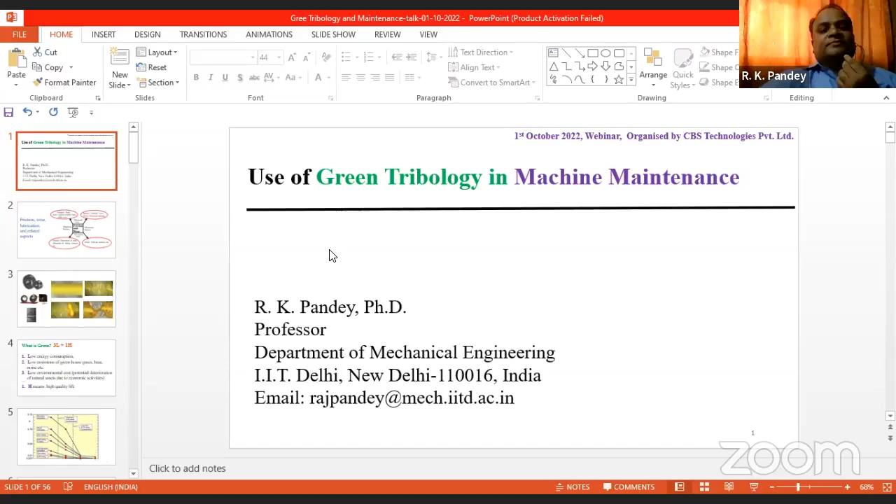Is it visible to all of you? Hello, please confirm. Yes sir, it's visible. Okay, visible, sir.

So basically, we'll be discussing the use of green tribology in machine maintenance. So the green aspect together with machine maintenance perspectives will be covered in this webinar. Let me start in a very focused way.

Normally, across our industrial life, we see a lot of machines, and these machines have some places, elements, where friction should be more, where it should be less, or where both friction and wear should be less. A very energy efficient system is needed. We are looking here—this combination, whatever you are able to see right now, is pointing out particularly what we are focusing on here.

So brakes, clutches, tires, etc.—we need minimum wear and maximum friction. So it's a friction-based system. And here, bearings, seals, gears, piston rings, and liners, slide ways—here we need minimum wear and minimum friction. And some places require maximum friction and maximum wear also; then only the system will work.

So I understand, for those who are a little unfamiliar with tribology—tribology involves basically friction, wear, and lubrication aspects. And this word got coined in 1966. This is very well-known, well-documented, and available everywhere.

Because the UK government set up one committee to study what losses were happening in UK industries, because engineers were not aware what friction is, what wear is, how to lubricate it. And another aspect was that as engineering was getting more mature, with more and more technology coming in, the maintenance cost of industries in the UK was increasing.

So the mandate of the committee was to study that and suggest what to be done. The committee constituted in 1964 submitted the report after two years, in 1966. This report was shared in the UK Parliament. And in 1966, people observed that in place of friction, wear, lubrication, only one word, tribology, was used.

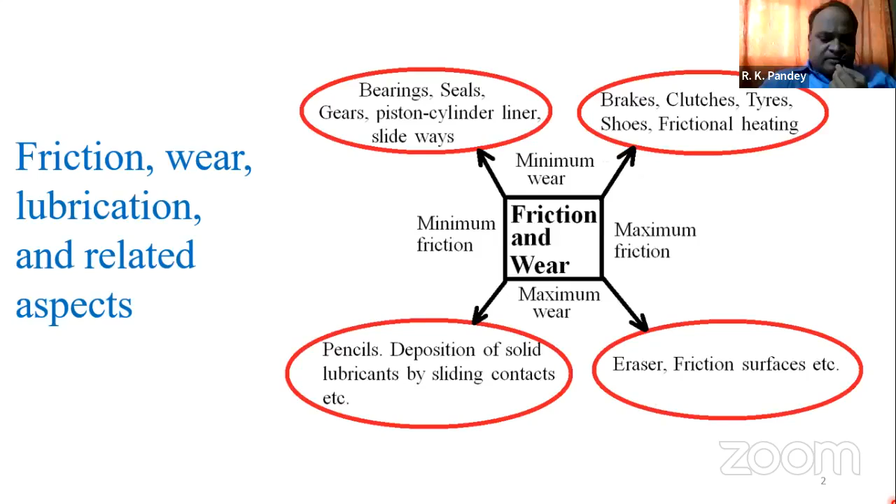So let us come directly to the machines. We are aware that gear sets, bearings, piston rings, lubrication aspects, many more. Surfaces are bound to happen there because two elements we are bringing together, then only functionality of the system is possible. So there is a need to assemble it.

But we understand that when two surfaces are being brought together, dry contact will be there. Friction will be very high, or solid friction will be there, and that is not required. The reason is, under loaded condition, if relative motion at the contact is happening inside the machine element, we understand the consequences: friction will be more, heating will be there, wear will be there, seizure may happen, and the system may stop functioning - total failure.

So it was thought, since ancient times, that if solid friction is there, the ideal situation is to replace it. But if that is not possible, then replace it by a lesser friction element, that is lubricated contact. If dry contact is replaced by fluid friction based contact, then that is acceptable - at least friction is getting reduced. Though the ideal condition is that physical contact should not happen, friction at all should not be there.

But we know this is not possible, functioning of the system may be lost. So physical contact is bound to happen. Then how to replace dry contact by lubricated contact?

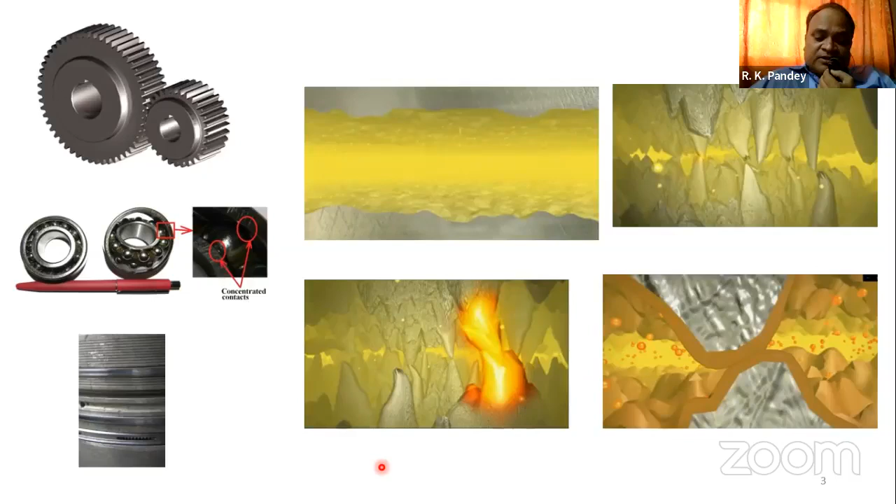So the question is, we have understood the meaning of tribology: friction, wear, lubrication. Together we study its consequences - how to reduce, how to increase - all these aspects we study under tribology.

So what is the green perspective today, what is the meaning of green? Green is 3L plus 1H. What is 3L? In a very generic sense, low energy consumption should be there in the machine element and system - mechanical system, since several machine elements may be involved in the machinery. So low energy consumption should be there, this is a green concept. Low emissions of greenhouse gases, heat generation, noise - all these also come under green. The third point is low environmental cost should be there, meaning whatever activities we are doing, our machines are doing, or whatever outcome comes, it should not degrade the environment. So potential deterioration of natural assets due to economic activities should be less.

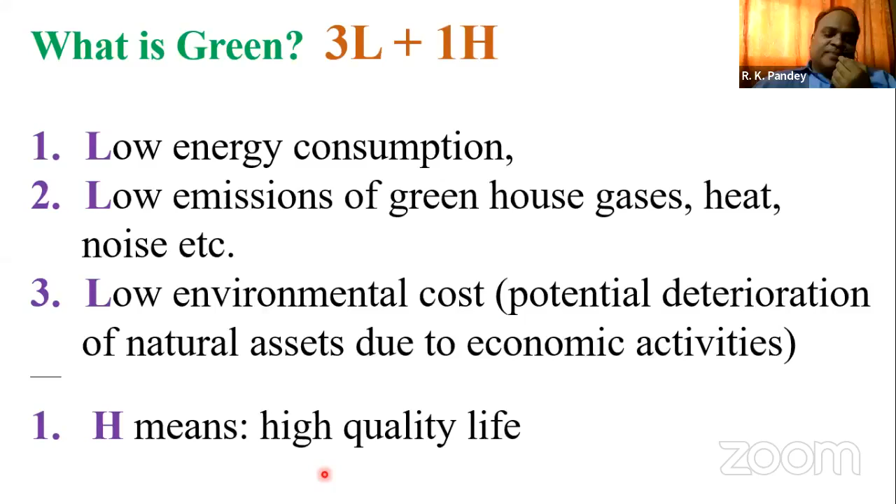And clubbing all 3L, we should get H - meaning high quality of life should be there. So everything is happening to improve the quality of life. So the green aspect is there.

Now if you see what people are doing across the globe - if you go about 25 years back, the regimes of lubrication were such that coefficient of friction varied from 0.15 to a little more than 10 to the power minus 3. Now massive research is being done across the globe, and the intention is that irrespective of the lubricant, irrespective of the contact - whether concentrated contact or conformal contact - everywhere friction should come closer to zero.

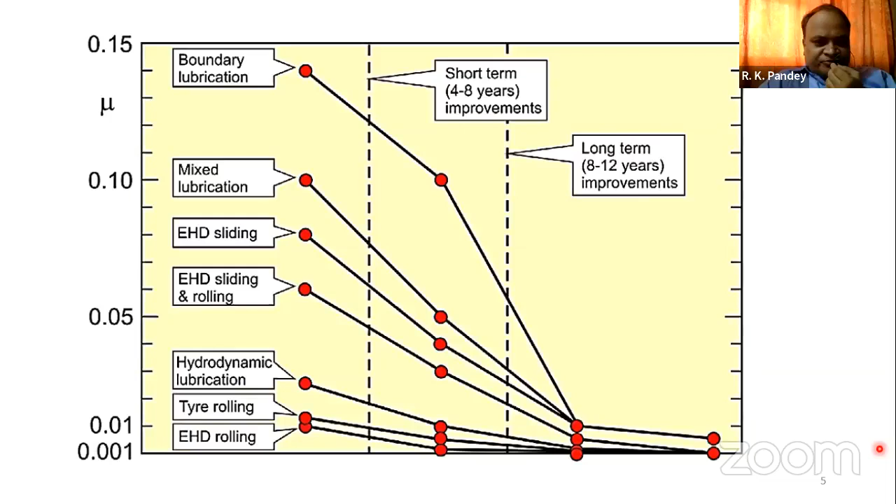So that is the objective, but presently it is not there. People in the laboratory have at least brought the coefficient of friction to the order of 10 to the power minus 3. And further research is going on to minimize this gap and bring the coefficient of friction, for all natures of contact, irrespective of lubrication regime, close to zero, of the order of 10 to the power minus 4 or 10 to the power minus 5.

So I think green is a broader term, and it involves minimization of heat generation. People understand that whatever emissions are there, that is only green. No, emissions are not the only green issue. Even if electric vehicles are coming, so we are replacing fossil fuel consumption and reducing emissions, that is the concept people are thinking, but it is not. Because electricity systems are there, somewhere we are generating electricity, and at least in our country coal-based plants are there. So coal is getting burnt, emissions are happening, and all those issues are still there.

And another thing, suppose we are able to replace electrical energy based on thermal power plants with nuclear or some other things, then what about the electric vehicle? An electric motor will be there, batteries will be there, so heating will be there, and all those systems also have their own consequences. It is well said that negative and positive will both be associated with everything. So electric vehicles are also having these types of issues, energy dissipation and heat generation. So if we are minimizing that, we are not warming the environment, and that is also green.

Where we are reducing wear, it is good, because where wear is there, we are changing the part, component, etc. Machining will be involved, further purchasing will be involved. So those issues are also very detrimental. So minimize wear, life should be long. A reduction or complete elimination of the lubricant: it is well said that lubricant may be blood for the machine, but it is poison for the environment. The disposal issue, the fumes and all the consequences are very degrading.

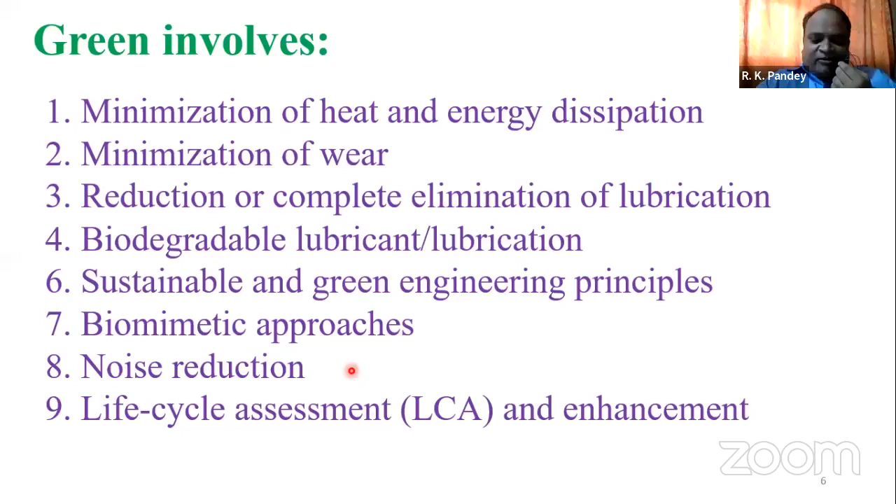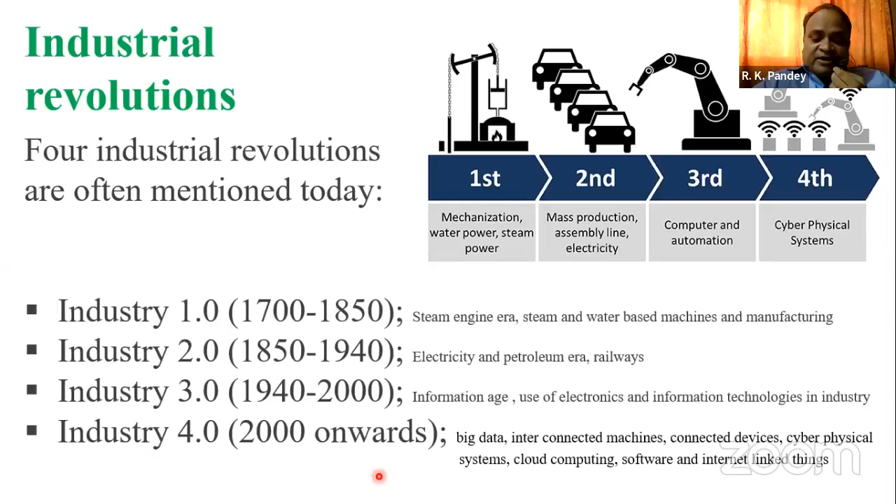So the industrial revolution happened, and we are aware of industry 1, industry 2, industry 3, industry 4. So what major points came during these eras? You have a look at this. But today's scenario is industry 4, where we are dealing with big data, interpretation, manipulation, cyber-based things. So our industry, our plants and factories, will basically be unmanned. Machines will be operating in that situation, so what tribology will do and how to deal with that is the issue. So see what is set inside industry 4, in cyber-physical systems.

So using this, machines will be working, industry of the future will be working. Now for these machines, advanced maintenance, monitoring and diagnostic systems are needed. And advanced technology for energy saving and life extension is needed. So we are focusing on this today.

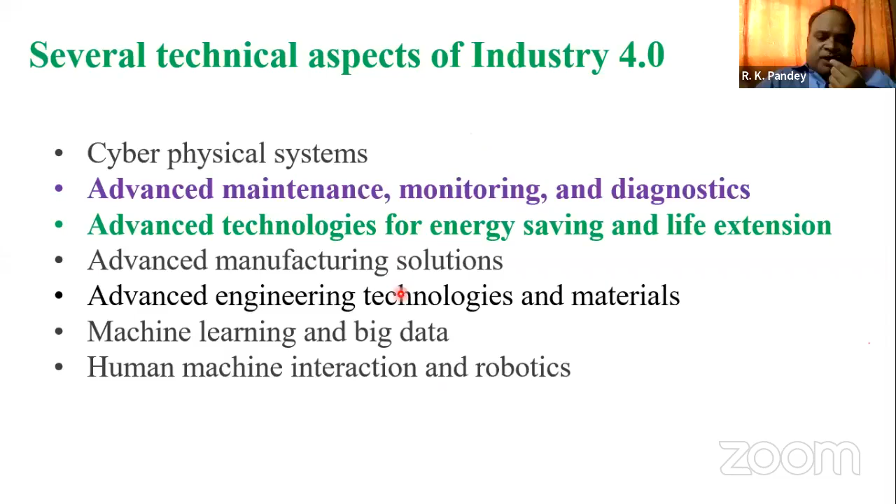The theme of today's seminar is how to address these concerns through tribology. And machine maintenance, of course, will be there. So we will be speaking on these 2 points, some part in this lecture, some part by another speaker. So this is a part of Industry 4.0, whatever we are talking about right now.

So I feel you are understanding now, tribology involves more and more scientific, environmental and socioeconomic issues. So when we involve these things in tribology, then it becomes green tribology. The term green tribology is recognized. So what do tribological studies regard? Transport, machine components, machining, forming. All these things are part of Industry 4.0.

So research is going on, we are doing it also, it is a futuristic thing. So all these things are part of green tribology. We are working and there is more work to be done. So there is a significant development of environmentally friendly tribology technology. All these things together we call green tribology. So there is a thrust in Industry 4.0 on green tribology.

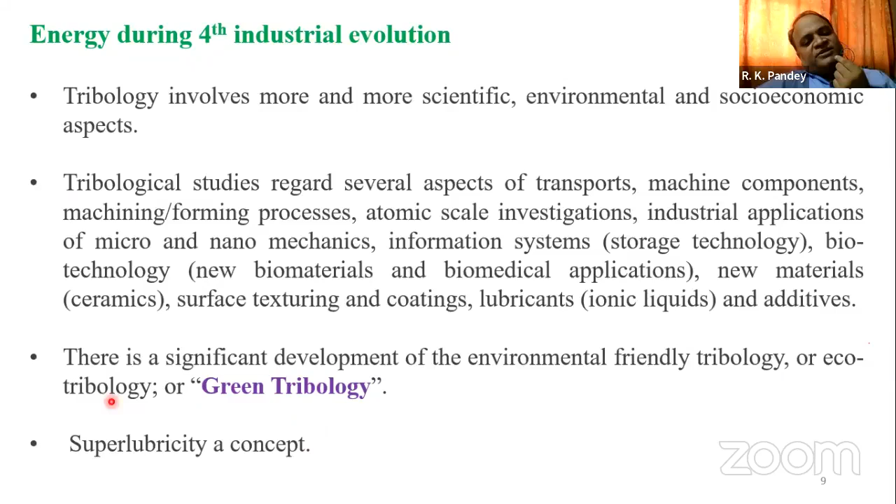And the concept I was talking about, getting friction to 10 to the power minus 4, 10 to the power minus 5, irrespective of the regime of lubrication, is called the super lubricity concept. Nowadays, worldwide research is going on this super lubricity concept.

So how to improve the energy efficiency of the system? I'll be giving 2 examples very quickly. This is basically the research of our team at IIT Delhi, our PhD students and M.Tech students. So let us see what we have done in tribology, how we have made it green tribology.

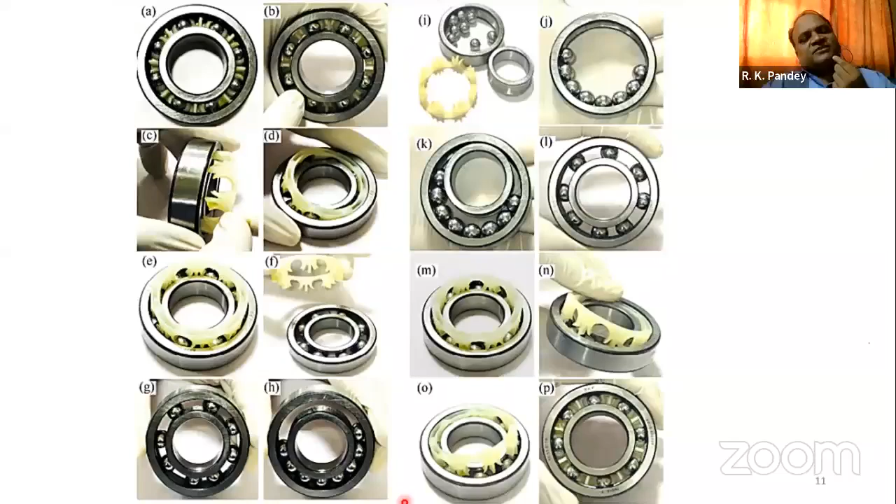About 80% of bearings used in industries, in machines, or even domestic appliances are ball bearings. Ball bearings are very prone to vibration. The reason is these bearings have low damping capacity. So what is to be done? How to enhance the damping? How to reduce the frictional losses inside these bearings? Because these bearings are used at a large scale. So here at Delhi we attempted this, and I would like to share those results with you.

In ball bearing lubrication, basically we reduce friction and wear using a lubricant. We are interposing a certain medium at the contact. Our intention is that friction and wear should be less. But grease lubrication is really very tricky. So here one example is being demonstrated.

We kept grease here, then we bring one ball here and just rotate it by hand. Now what is happening? Grease is getting pushed aside. After 2-3 rotations, the grease has gone. Now imagine in a machine at high speed, if the rotor or shaft is rotating, the grease will be pushed aside. It will be thrown because centrifugal force acts on the grease itself, and the balls are moving very fast.

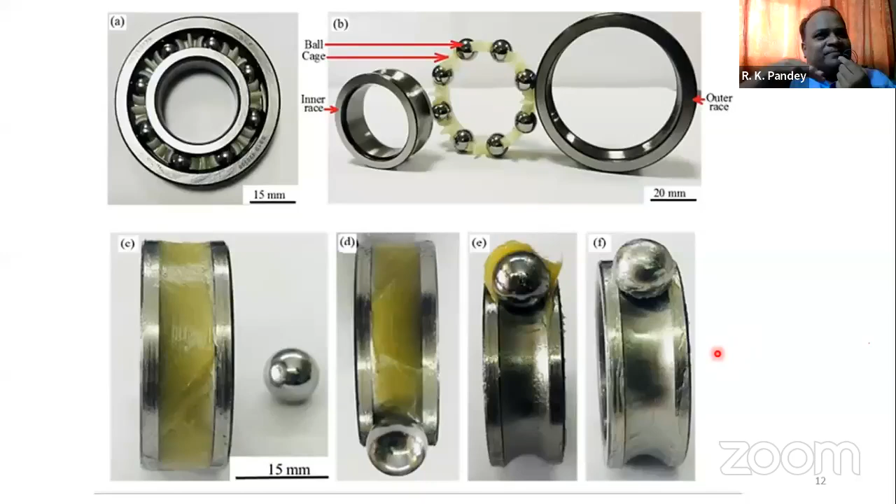And grease is basically soap, and soap has a considerably larger yield strength compared to oil. So grease coming back onto the track is very difficult. So why are ball bearings prone to vibration? The reason is the inherent damping capacity of bearings is very low. And we assume lubrication is happening, but basically it is not happening. I'll be demonstrating some images and explaining this.

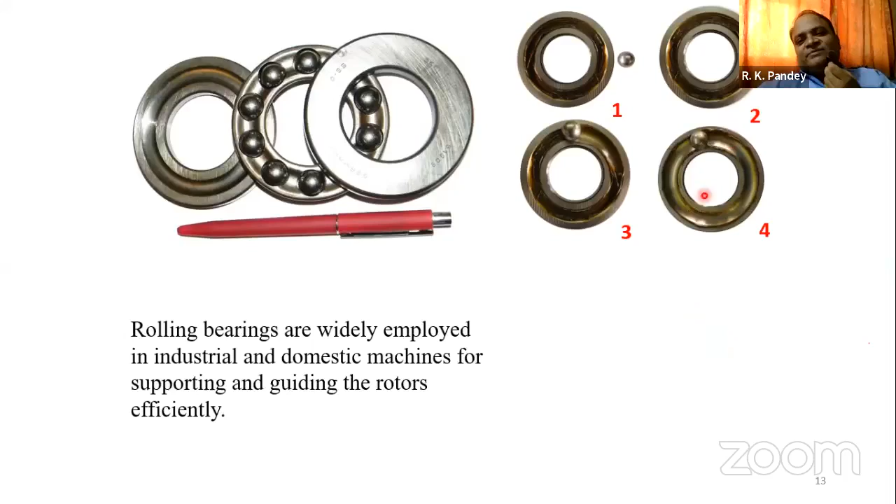So here, this is a thrust ball bearing. We have taken one grease grade, and now the ball has been brought, you see. Now it has been rotated. After 2-3 turns, the grease is getting pushed aside. This is a demonstration of how the bearing will be working.

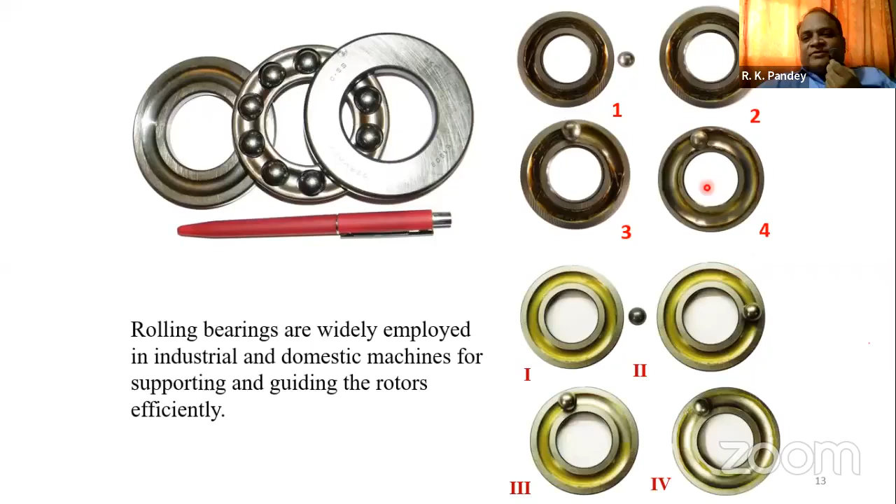Now here we are using a lower NLGI number grease, same setup, same concept, and a few rotations are done. So let us compare this and this. What is happening here? Here the NLGI number is high, and the grease on the track is getting removed. We did only 3-4 turns like that.

And here, this is a lower NLGI number. So a little grease is there, available at the base. The issue is that once it runs at very high speed, maybe 2000, maybe 1500 RPM, then you can imagine there will obviously be metallic contact.

Little lubricity may be there. Traces of the grease or oil may be there. So that will be working well, and mainly ball bearings work because rolling friction itself is less. Even if metallic contact is there, friction will be very less. So we thought how to improve it, what is to be done.

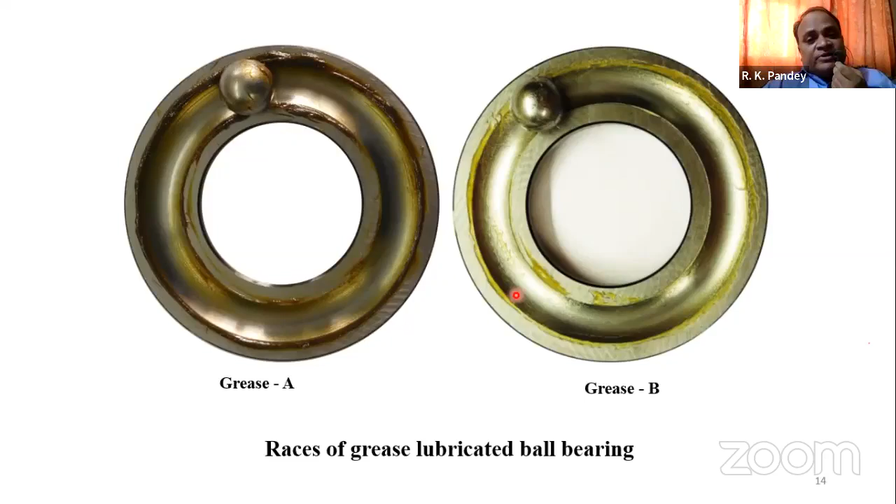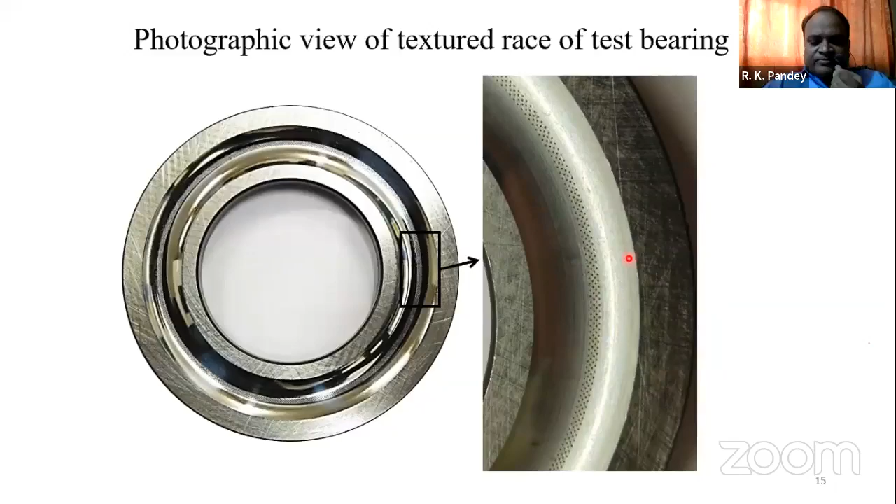So here one concept is there nowadays. If you are looking here, the texture concept is emerging, a very viable concept. So you are looking here, certain steps are being implemented. Through laser we did it like that. Whatever holes are visible right now won't appear like that to the naked eye. This is 10 micrometer, 20 micrometer size.

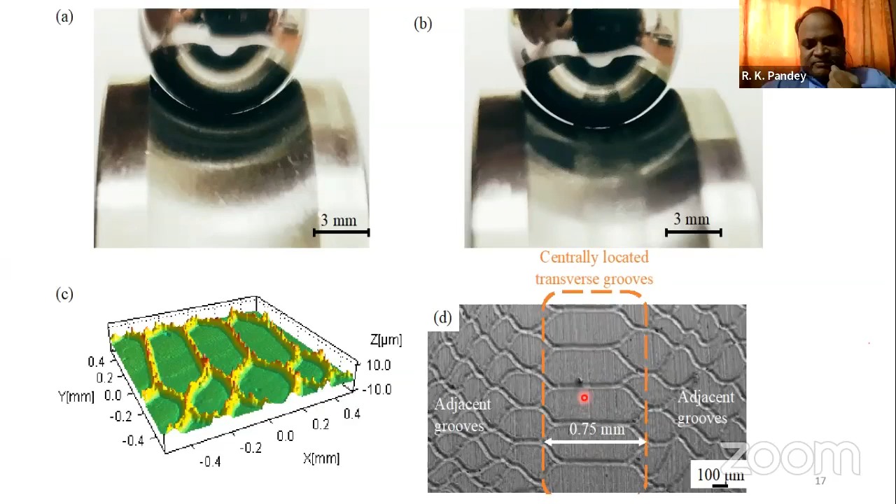What is the logic behind that? The logic was that grease is not present at all when dynamics is happening. So why not give micro grooves so grease should be available here. And when heating is there, whatever soap is there and the bleeding of oil will come here, and better lubrication will happen. So this we did, and we conducted an experiment.

So you are looking here, a load cell is there, and we tried to measure frictional torque. In a ball bearing, as such, friction coefficient is not there because several types of contacts are there. Some contacts may have high load, some less load. Balls are there, cages are there. Normally I have seen people find the friction coefficient of a ball bearing. It's not like that. It is always frictional torque, because we are finding it in totality. So frictional torque has been measured here.

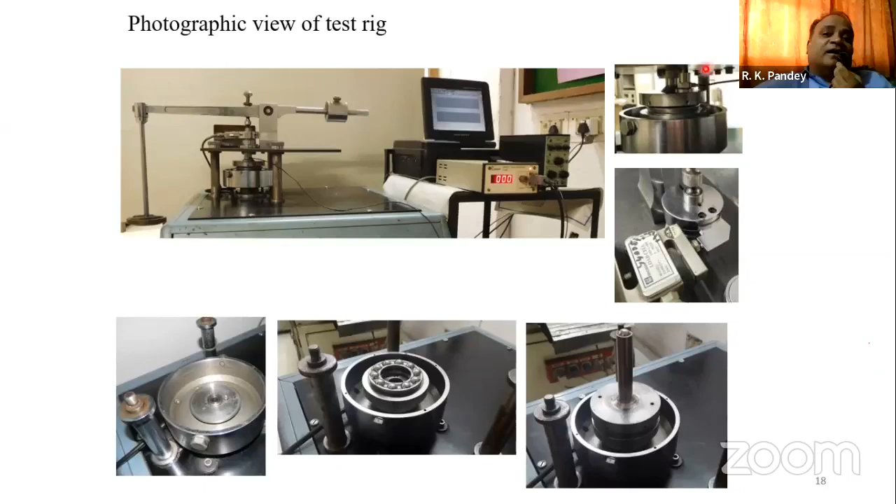And here you see, an accelerometer is also there. This accelerometer is meant to understand its dynamic vibration, because when the fatigue test is done, if surfaces get damaged, ultimately we have to go in the shelter of temperature rise, increased frictional torque, and enhanced vibration. So these 3 parameters we have to correlate. So this experiment was done, and I would like to tell you the status.

So this is the conventional race when texture was not done, and when texture was done. You see the retainability of the grease here, and here grease is not there. Because film thickness visualization is very difficult, we kept one finger there and just removed it, so these ridges have been formed. It is indicating the quantity of lubricant available is more here, and here it is very less. So this is the advantage.

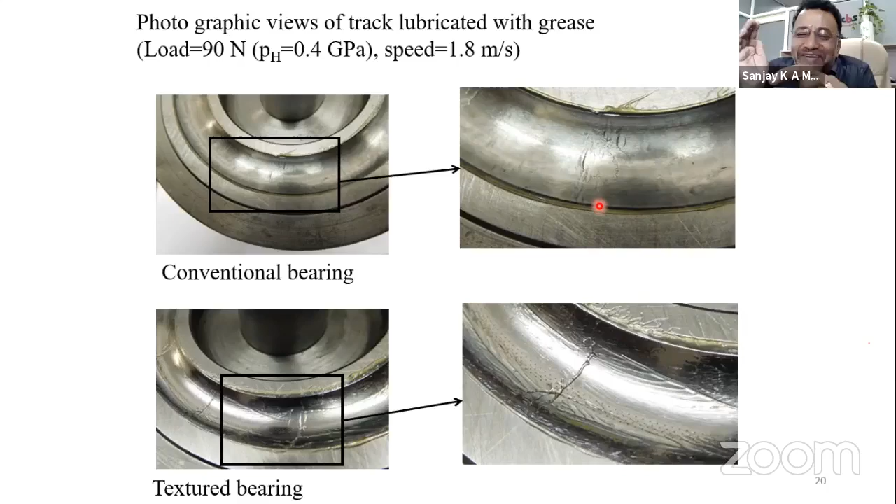Dr. Pandey, can I disturb you, sir? Time is up. Okay, yeah. One minute more, sir. Okay, we will have a separate session. Yeah, one minute, quickly. Only one minute.

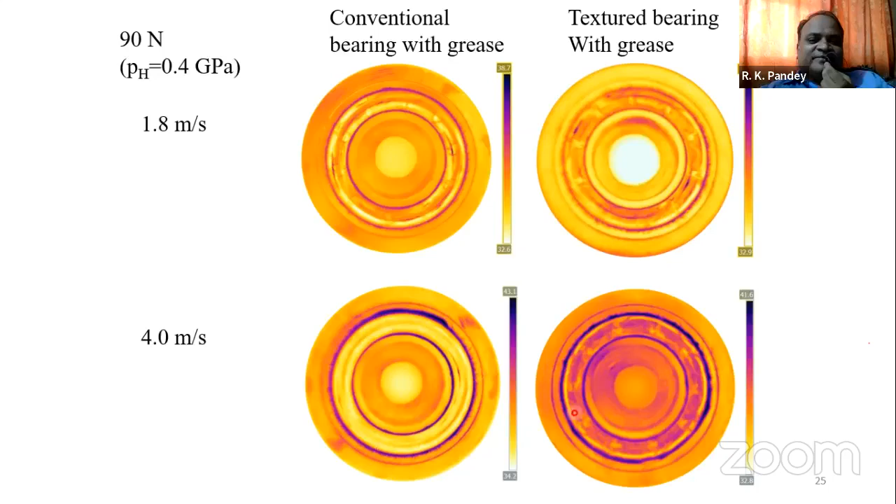So, just you see, we did certain research, and then the advantage. If you see here the bearing, bearing greases are here. You are looking here, this is getting pushed aside, so here at the contact this is not there. This is thermography. The images you are looking at are of the thrust ball bearing. It is indicating that grease is getting deposited once a certain texture is done.

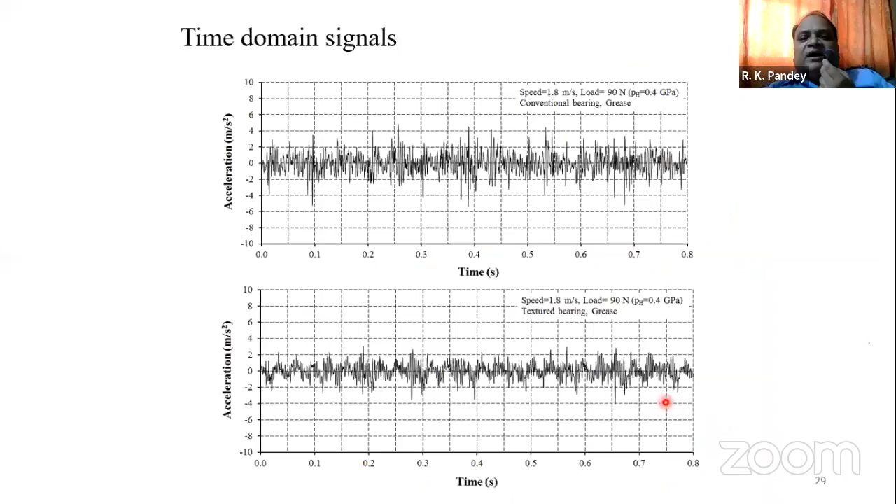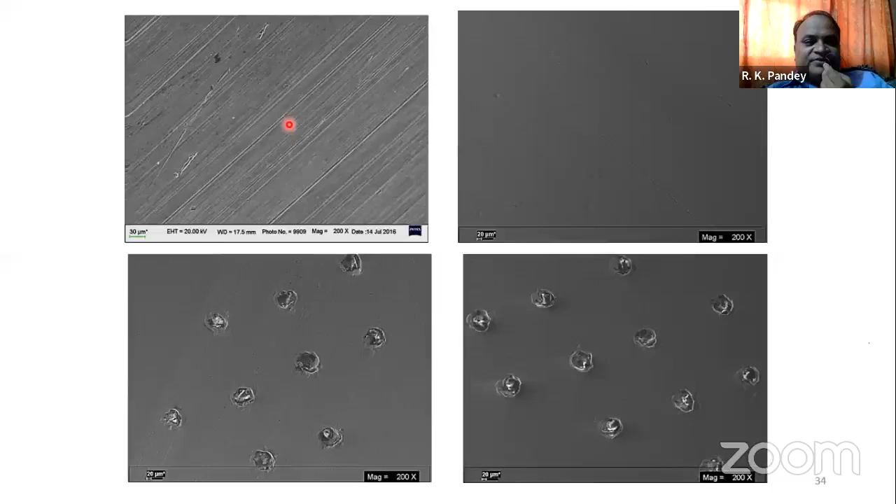And obviously here in vibration, if you see in the time domain, it has been reduced. And similarly, vibration in the frequency domain is reduced also. And surfaces are not getting scratched when we are putting this dimple. If you see, this is the conventional surface. And similarly, we have used it in gear also, and in this vacuum pump.

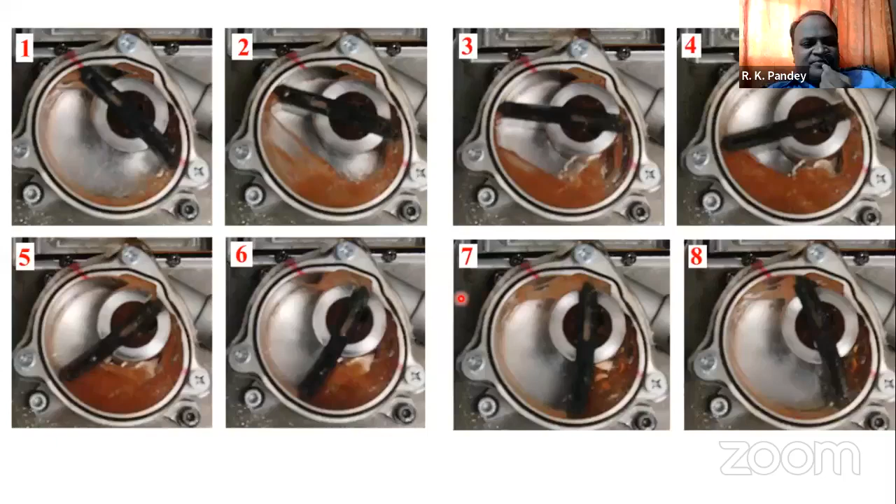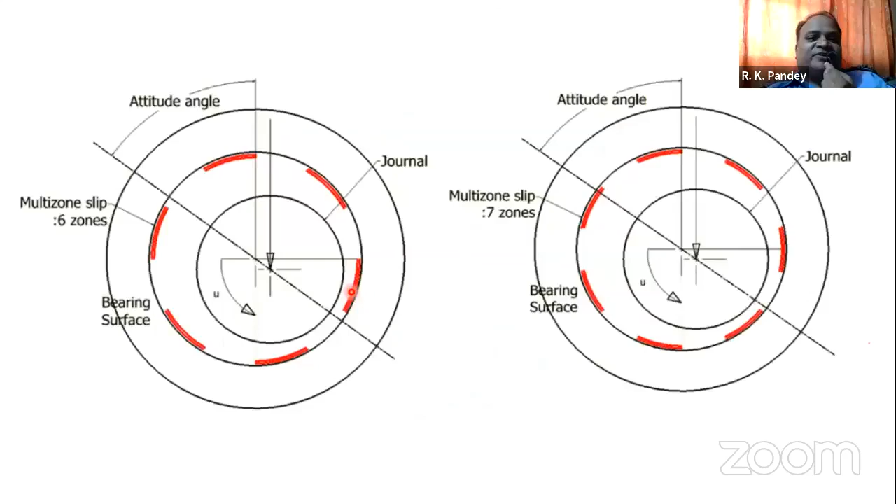On the vacuum pump also we have done certain studies, but time is very less, so I'll be skipping all these things. Some other day, if the opportunity is there, I'll be talking. Here also a lot of tribology is involved, because between aluminum and plastic a huge coefficient of friction is there. So how to minimize it? Certain texture we are copying here, and we are using it on the journal bearing.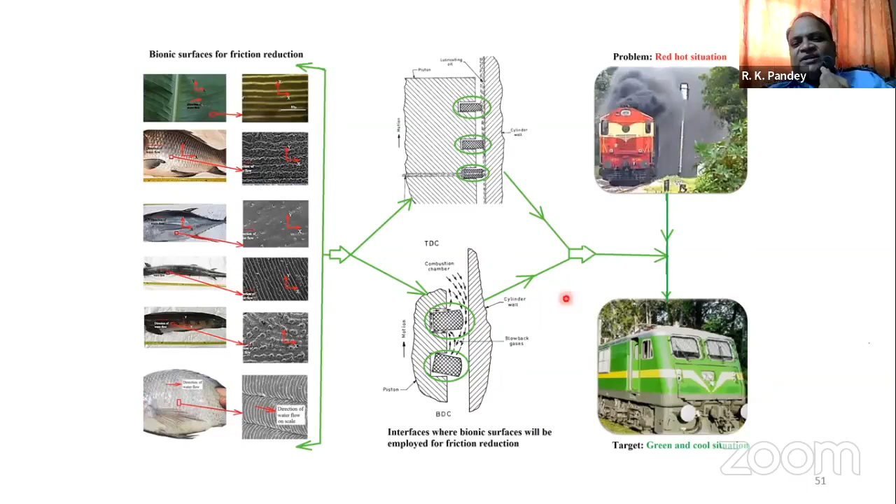So one of the projects, Uchchatar Avishkar Yojana, is running. So we are implementing this technology in piston rings, and we are talking about the engine concept. So here some experiments are there. Similarly, wet clutches are there. So here parasitic losses will be there in the wet clutches. We are improving those also, and we have done it.

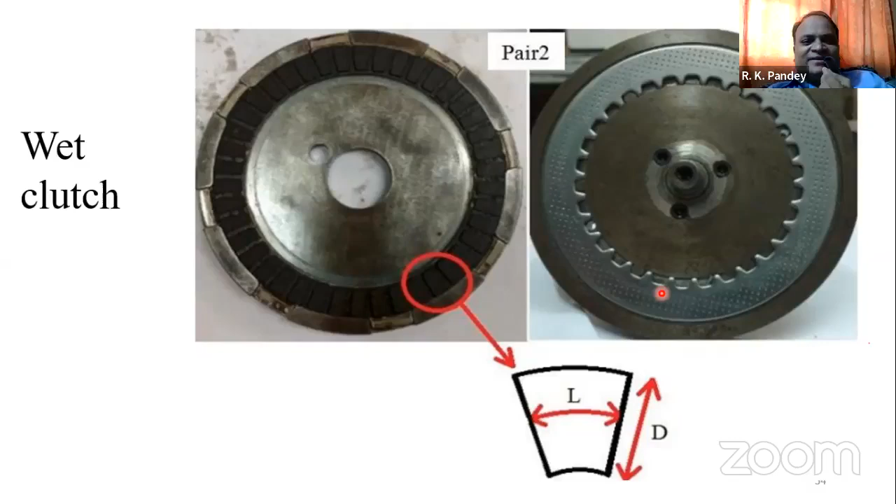Thank you so much. This is only the start of a practice of creating awareness about tribology in the country. We, as a country, are committed to carbon neutrality. It is a wonderful technical presentation, Dr. Pandey. Truly, not being in the engineering field, I could make out some 10-20% sense of this. We will definitely come back to you for a more in-depth session on that.

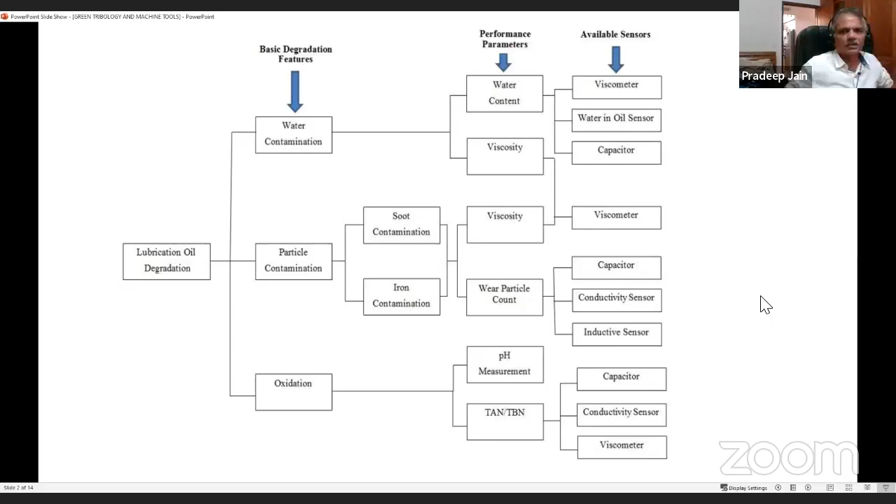I'm getting many calls. Just a minute. Let me see. Yes, now it's available. Yeah, it's visible now. Okay. So this basically flow chart shows you. No, just a minute.

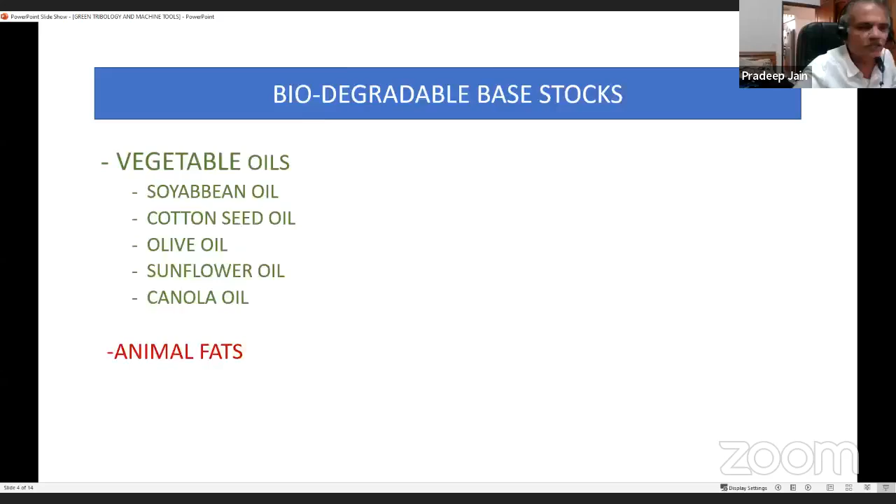What are the major degradation features? Water contamination, particle contamination, oxidation. And there are certain parameters by which we can see how the degradation is taking place. We can apply sensors, because on some machines we have installed sensors like these, like viscometer, water in oil sensor, and conductivity sensors, to measure the degradation of the oil in real time.

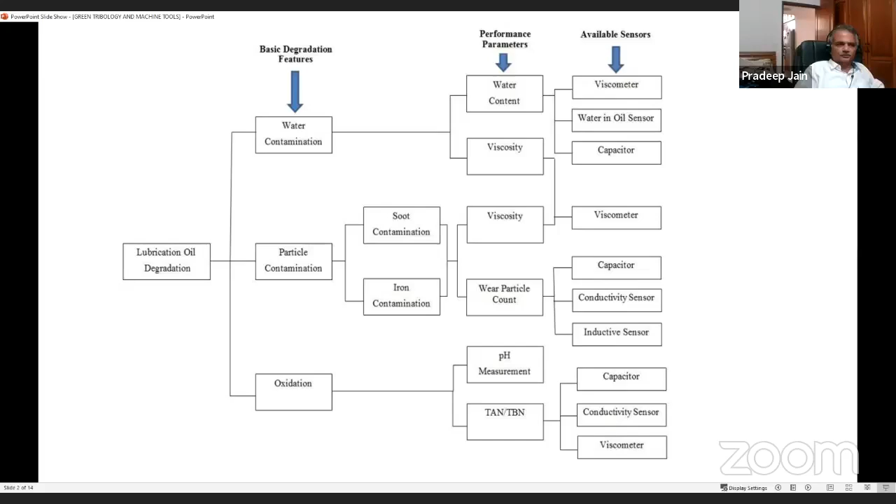Now, when it comes to green tribology, we speak of biodegradables. We all know that vegetable oils and animal fats, which we had been using since quite ancient times, are very good lubricants, but there were certain disadvantages with these. With the rise in industrial activities, the mineral-based lubricants came into picture.

Most of the mineral-based oil we treat as biodegradable, inherently biodegradable, but they cannot be treated as biodegradable because they don't degrade as per some ISO standards, that is perhaps ISO 9439. They don't get decomposed to 60% within 28 days. Whereas most of the mineral-based oils get degenerated by 15 to 30% in 28 days. They don't come into the category of biodegradables.

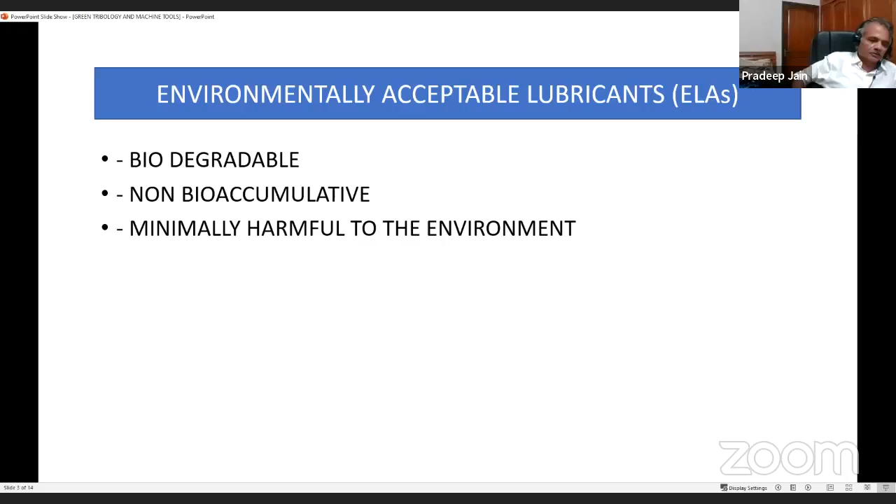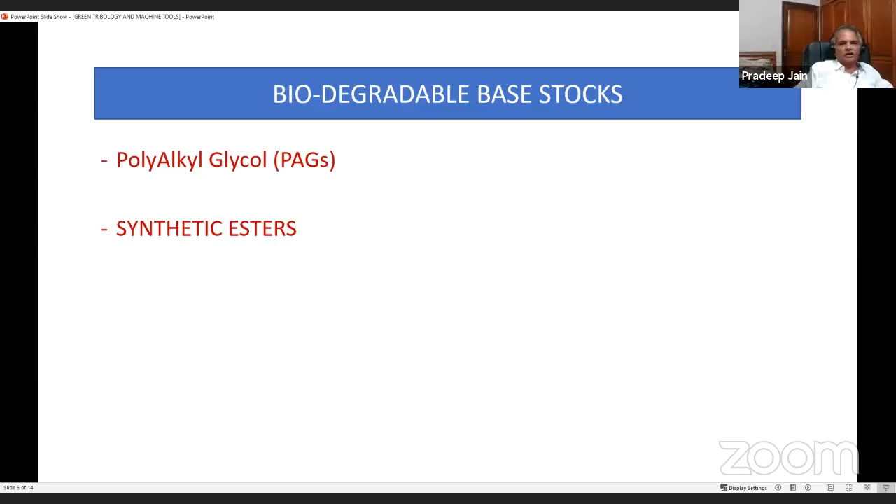So we must find out solutions. This is once again the challenge to our green engineering field, where we can have biodegradable base stocks made from vegetable oils, animal fats, and some PAGs also, and synthetic esters, man-made ones.

Once we are talking about oil and lubrication systems in machine tools, they can broadly be categorized into boundary layer lubrication, hydrostatic lubrication, gear lubrication, hydrostatic power packs, air oil lubrication systems, and aerostatic systems. Like we have the hydrostatic system, where between the two moving parts there is an oil film. Here in the aerostatic systems, there is no oil, but only air, compressed air. Of course, some very minimum quantity of lubricant is there, air mist type.

And once again, when we are inching towards minimalistic lubrication systems, we have challenges of lubricating high speed angular contact ball bearings, where we have used air oil lubrication systems, where major quantity air at a pressure of say 6 bar or so, and a few droplets of oil are injected into the stream, and through tiny tubes it goes directly to the balls of the bearing, where it definitely lubricates and takes away the heat also. These systems are very much prevalent in today's high RPM, high speed machines.

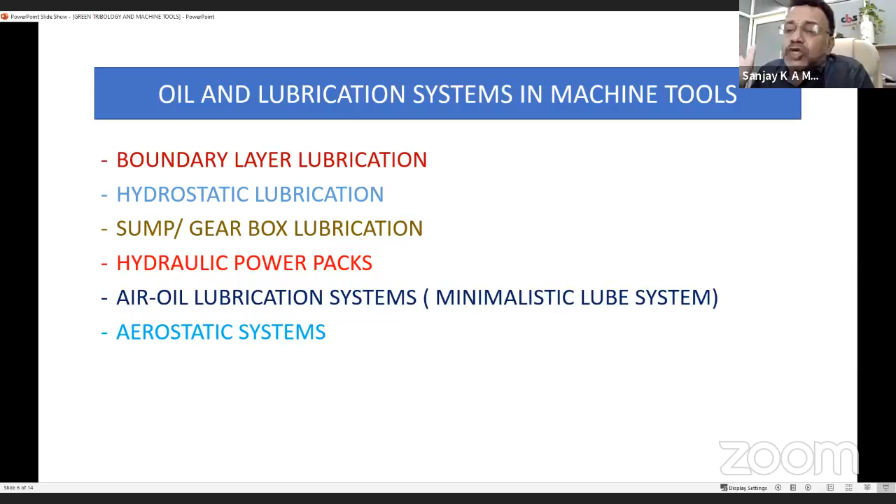Jain sir, sorry, please try to conclude in the next 30 seconds. Okay, then I'm okay. Yeah, sorry.

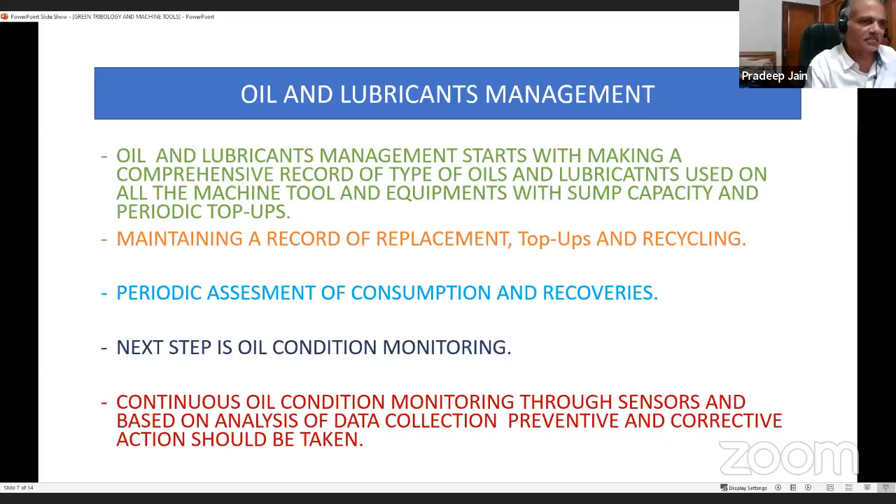Basically, what we could do: we can do our bit on the side of reducing, because reduction is nothing but how we manage our oil. How do we do our oil management? One of the ways is installation of parallel oil... No, I think something is misprinted.

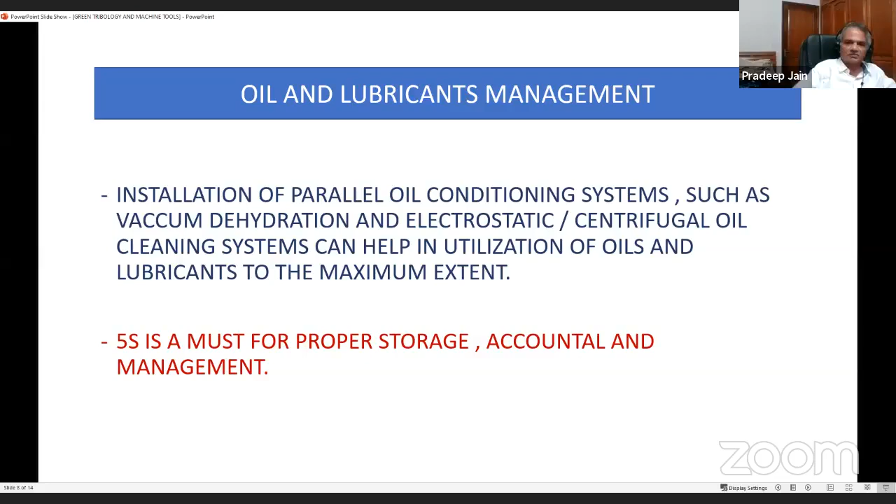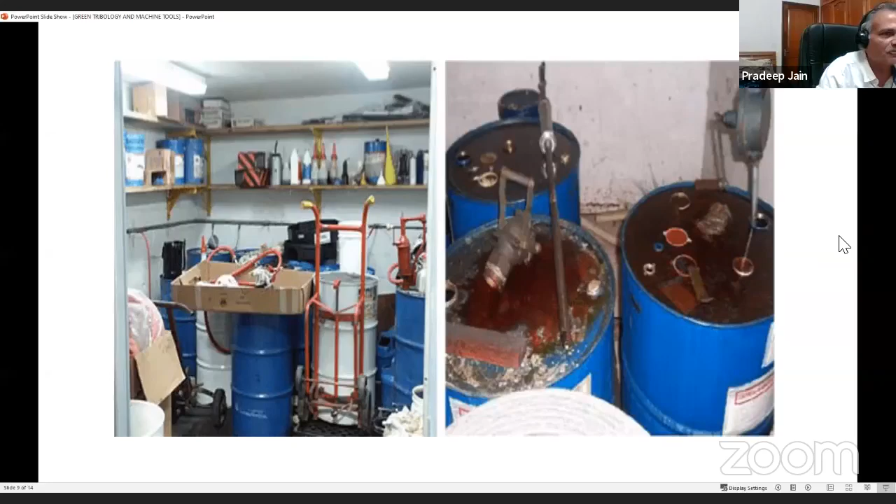Oil conditioning systems like vacuum dehydration, electrostatic cleaning and centrifuging oil, which is the field of Mr. Sanjay, and cleaning systems, which help in utilizing the oil and lubricants to their maximum life. 5S is a must for proper storage, accountal, and management. We in the industry had been storing oil like this earlier, but things have changed now. Grease was stored like this. We are moving towards 5S, better housekeeping, and better storage and disposal systems like this.

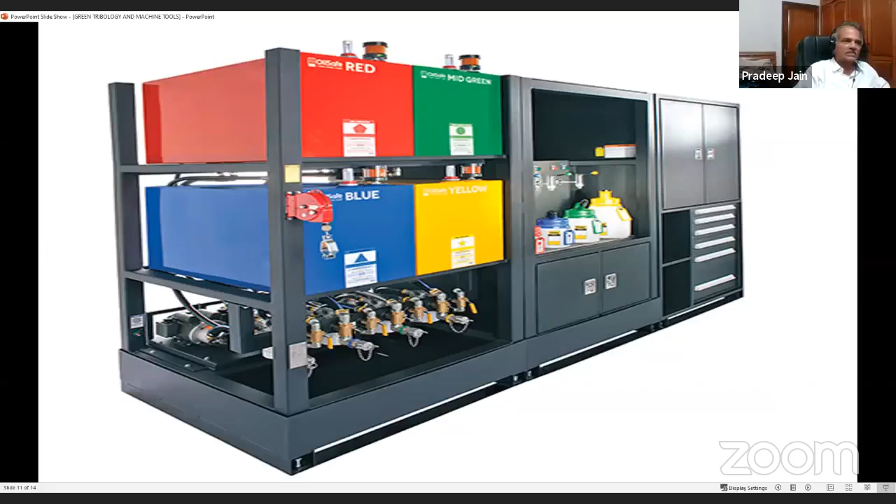And now we color code oil pour points, and we also make a record of how much oil is consumed. We have tried automated systems also in some of our machines, where how much quantity is being poured in, and how the level of oil getting depleted is recorded automatically. And we definitely analyze that data to see how to reduce the use of lubricants.

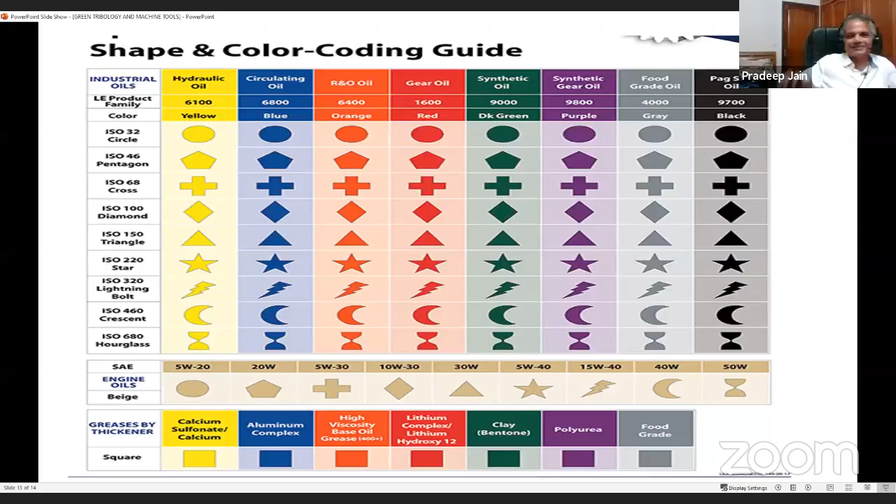And that is perhaps my bit of notes. Thank you, thank you very much.